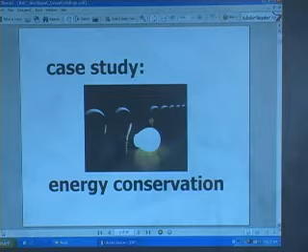This case study was in energy conservation. This woman who works for a school district, Pearl, down in Florida, she was interested in saving energy in her whole school district. It's a rather large school district. If you're from New Hampshire, school districts, you kind of think on a smaller scale. School districts could be 10 or 15 schools. Down in Florida, they could be 50 or 60 schools, if not even a lot more.

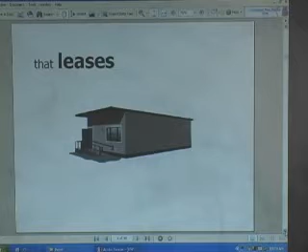And the schools down in Florida lease large numbers of the portable modular classrooms because they're growing so fast down there. The population's exploding, and there's a lot of children. So Pearl was looking for a way to save energy in all these portable classrooms. So she contacted Bruce. Bruce is an expert with KMC Controls. Bruce works for a company just like ours, although he's a little bit bigger than we are, down in Florida. And Pearl identified 12 modular classroom buildings that she wanted to target for a proposal to save some energy.

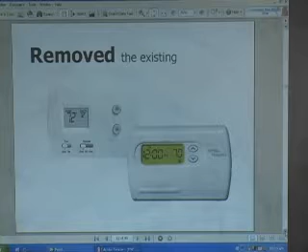So what they did is together they developed a project to remove the existing programmable thermostats. Now, they already had programmable thermostats with schedules that worked and everything for the heating and air conditioning, and mostly just air conditioning in Florida. But these programmable thermostats more or less function like a kitchen timer and a meat thermometer. Not hugely accurate and not going to accomplish a whole heck of a lot there.

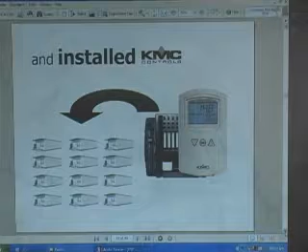So together with Bruce, they installed some building automation controls. And this isn't a KMC presentation. This wouldn't matter whether they were Johnson or Honeywell controls. The idea is that they put in a building automation system into the 12 modular classroom buildings. And Pearl, once it was completed, estimated that the project showed a return in 12 to 18 months of almost $10,000. So she got a little bit excited about that.

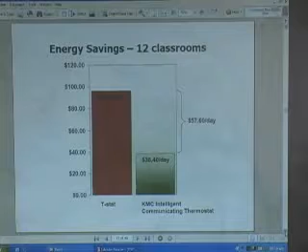And analyzing the data, they came to the conclusion that the building automation system was actually saving them about 60% of their electric bill consistently. So they became more and more excited about these facts as they were analyzing them. Looking at the actual savings, based on what real numbers are, in the Northeast here, we're probably around 10, 11 cents a kW? 12 cents? Well, I don't know what it is commercial. Residential's around 14. Okay, I think the commercial, it depends on who you have and what contracts, but they're probably closer down to 12 cents a kW.

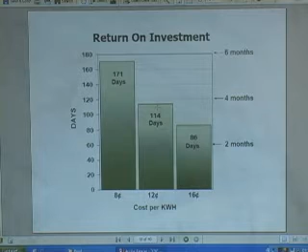Looking at this little project, though, the payback is potentially less than 4 months. In fact, down in Florida, the payback ended up being 6 months to pay for the project for the 12 classrooms. So Pearl got pretty excited about that and wrote a second proposal to install the same system with the same features in quite a few more portable classrooms. The proposal impressed the school district, and they approved it, and they moved forward.

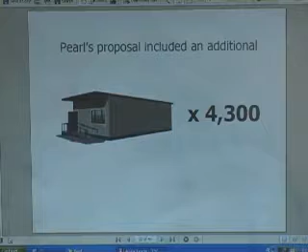Whoops. And they actually brought this to 4,300 portable classrooms in this one school district. And if you can picture this, I know it's hard. I've actually been down there to see this, but it's hard to envision over 4,000 portable classrooms in one school district, but they're there, believe it. But the bottom line is the school district is saving $7 million a year in energy savings just in the portable classrooms with this one project.

And these weren't big buildings with complex systems. I mean, they're just portable classrooms with, in many cases, if you're familiar with the stand-up air conditioning units, they're almost like a window air conditioner, but vertical and mounted to the wall. In many cases, that's all they had. They actually did a little bit more with lighting, adding a little bit of lighting to the system as well.

In addition to the electrical savings, they had a 35% reduction in maintenance on the HVAC equipment because their run times were reduced. They have less air filter changes. The equipment wear and tear has been reduced. So they're basically operating what they have in the most efficient way.

Since that project was developed and implemented, the software engineers at KMC Controls have delved into the success of this project to develop even better algorithms and controls in sequences. And they've adapted or employed a learning program. So they're actually taking

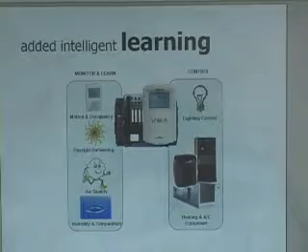motion detectors in the classrooms, and in addition to a regular schedule, they're taking the information of the light in the classroom and the occupancy of the classroom and having that further the occupancy schedule over time, to bring the lights on only when necessary, to bring the HVAC system on only when people are in the classroom. And different usages of those classrooms are learned by the system and adapted over time.

So we're just starting to see the building automation industry actually being able to take the step from a conventional schedule of 6 a.m. to 9 p.m. we're occupied. That was the initial part of what programmable thermostats did.

In building automation, we've for years done optimum stop-start, where we actually look at the temperature change in the classroom and just do a simple math formula to come up with let's start a half hour earlier to get the classroom down to temperature or up to temperature on time, and basically turn the system unoccupied earlier in the day to let it coast to save a little bit more energy.

We've even gone beyond that, and we're actually having systems learn how you're using a facility to be able to further refine the sequences. Are you monitoring, do you have a system yet where you can monitor the light levels and actually have the lights come off and on, like if it's a bright sunny day? Yes, absolutely. In addition to that, yes, they're absolutely doing that.

We've seen buildings with lighting projects where they're actually taking older fixtures and modifying them with lighting controls. So if you had a 4-light fluorescent fixture, we'll take two of the 4 lights and put them on a separate circuit, a smart circuit where we can control it. So we can look at the light levels in the area and further refine the lighting offered.

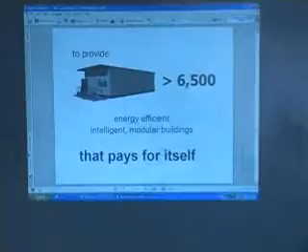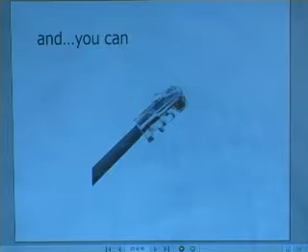So they've taken this process and dealers in big cities are providing the solution to classrooms and areas throughout the country. They're connecting all the systems via their local networks or wide area networks, and they're making a web-based control system that's taking whole school districts and campuses and being able to operate them efficiently from one central location. Even getting more savings.

Or in some areas, because you brought up one of the good points this morning when we were discussing, if there's already a system, for example, a system across the street in the other building that's a different control system manufacturer than what's going to be proposed for this building, there's ways of actually partnering those two systems together now. So you can take an energy management system with protocols that are available today and have them work together, as an end user, to have an actual enterprise-wide system that functions and operates seamlessly.

Another beauty of the type of system that we're discussing here, the building automation system, beyond a programmable thermostat, is you can actually modify the system as sequences, new ideas or concepts come up. They can just be changed and modified to stay current. Whereas with a programmable thermostat, obviously, that's not going to happen.

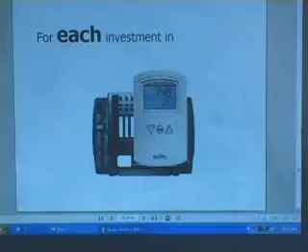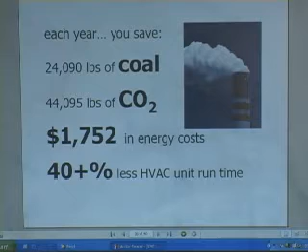For each investment in a building automation system versus your programmable kitchen timer solution, in this particular application, we're saving 24,000 pounds of coal and reducing 44,000 pounds of CO2 emissions and saving $1,752 per building in energy costs, plus 40% reduced runtime on the HVAC equipment, saving further maintenance costs. And a little bit of data, 36% of the nation's schools use portable classrooms.

So this one case study that was done with KMC Controls and a building automation contractor, much like us, has saved a significant amount of energy. It's gotten a lot of people's attention, and it really piqued my interest when it was first presented to me, because the first thing I thought of is, wow, I wonder what opportunities exist right in my own territory, even though we don't have portable classrooms widely used.

I mean, they're used, but not to the degree that they are in Florida. There's potential for some savings there. But more importantly, pretty much any building that doesn't have a building automation system is a candidate for this type of project.

So that's pretty much the end of this presentation. I wanted to show you that primarily just to give you the impact of what a building automation system can mean to a school district or to our industry. It's a changing technology that's really advancing quickly and allowing us to make some huge impacts in cost and

energy savings. Question now, because you've been talking about the same thing: most of these systems seem to be geared strictly industrial, commercial. Does anybody do home systems? Oh, yes. Want to automate a home? Absolutely.

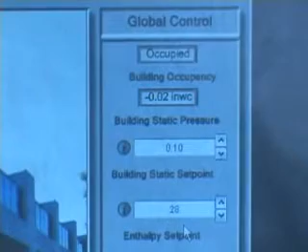They want to be able to keep that building slightly pressurized at all times because of some of the processes and tenants that are inside the building. So that's something that they're watching very closely. And energy savings is a big concern for this facility. This was an existing facility that we added our building automation system in. So they wanted to wring out a lot of energy dollars.

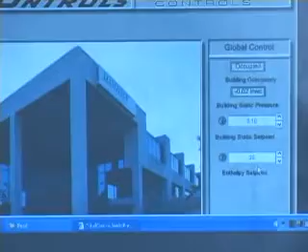Now we've just barely turned this system on. We completed the installation last week, and the front end, the graphical user interface, we actually just turned on over the weekend. So this is brand spanking new. We haven't even proofed it yet, and we haven't gone through the commissioning process yet, which is something we'll talk about a little bit later. It's amazing. It's got a relative humidity. And this is your remote login, right?

This is Internet Explorer. I'm just using Internet Explorer to browse to the site. Most of the major control manufacturers are offering software packages that allow for building automation systems to be accessible over the internet. So would you have to go to the site in order to reset parameters and things like that, or could you do that remotely? Yep, we can do it remotely, absolutely.

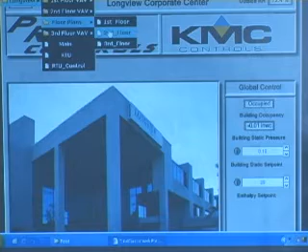There's different methods of being able to actually program the controllers. Typically, you're not going to program the controllers via the web browser. In some cases, I can. But most of the time, we're going to use a different software package, a technician's tool, per se, to get into the controller and actually program the controller. There must be some security built in. Oh, absolutely.

You can access it online. Absolutely. Well, you can have lots of fun on April Fool's Day. I can imagine.

You know, this would be a typical floor plan. We're gonna show the... It's all working too. This is great. It's a good day for me.

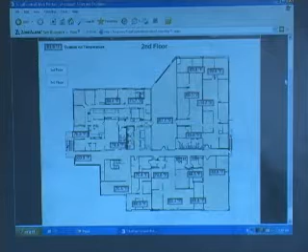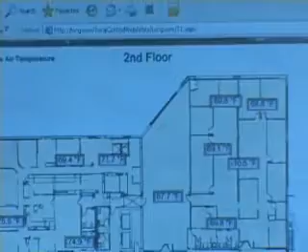We'll typically show just a floor plan that gives them some overview of what the room temperatures are in the spaces. So at a glance, the building operator can look and see if there's any glaring problems. In addition to any alarms that might happen, we display alarms right on the front end, and we can display alarms in email, pagers, cell phones.

How much control do the occupants of those rooms have on the temperatures? As much as we want to give them. For example, we'll just grab any room here. FPVAV 22. Sometimes it's hard for us to get away from the nomenclature that we work in our industry. This is one of the struggles, kind of goes with what you were talking about a little bit earlier, Wes.

We're building automation control contractors. We're working with mechanical engineers, and yet we're interfacing to an end user. So we're using terms that everybody else is, and then we're trying to translate that into a system that anybody can understand. So FPVAV, it's a fan-powered VAV box, and it's box number 22. It makes a lot of sense to me, but the folks on site may look at that and say, well, I don't like that. That doesn't tell me. I want that to say Mary's office.

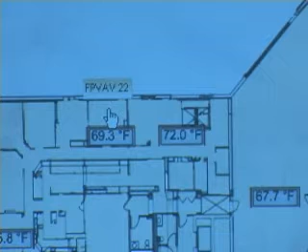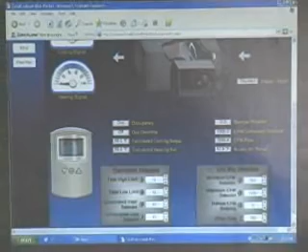Yep. So we'll dive into this VAV box right now. Wow. Very nice. Is this for that room? Yes. I just clicked on that room, and we're right down into the room. Excuse me, would it help if I tried to make the picture larger? It might, yeah. Let me see if I can do that.

So, two points I want to get back to tie this in together for you. Your question, how much range do they have in their thermostat set point? Well, this is the actual room temperature, and this is the high and low limit of what we're going to allow them to adjust at the thermostat. So what else do we want, airflow, air changes, drive operating time?

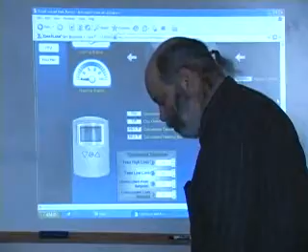Wow, 74. That sounds pretty low. Is your reheat set to 0? Or is that its current reading? That's actually its current. Right now, the stage reheat is disabled, and the heating signal is 0. Right, I see it there. Yeah, I like that.

So right now, this box is in a cooling mode. Our cooling signal is 100%, as it should be. It's working, another good thing. Everything's happening great today. The room temperature is 69.1. The actual calculated cooling set point is 68. So we're actually trying to cool that room down to 68 right now.

And you'll notice that I've labeled these. Well, I've got to do a little proofreading here. I chopped off my set points. I've labeled these calculated set points, and the reason why they're calculated is because the folks can go to their thermostat and make an adjustment, and the system is going to interpret that adjustment to do what we allow them to do. So then it becomes a calculated set point.

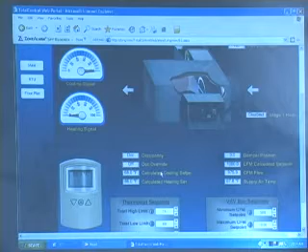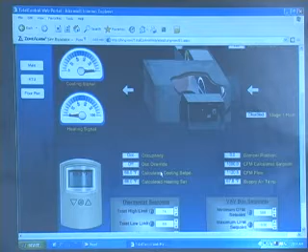For most every heating cooling application, you have a cooling set point and a heating set point. We obviously don't want those to overlap, otherwise any potential energy savings are gone if you have heat and cooling on at the same time. So we have our own internal standards, and I'm sure most building automation contractors are the same. We usually offer a 2-degree deadband between heating and cooling. That's widely accepted for most applications, offices, schools, as a standard starting point.

We'll refine that further in specific projects. We have projects where the engineer will decide that the building operator, who's maybe at a higher level than most, let's say a manufacturing business, may want to have access and control over the deadbands and other tuning parameters.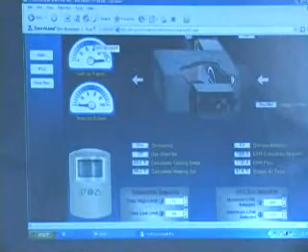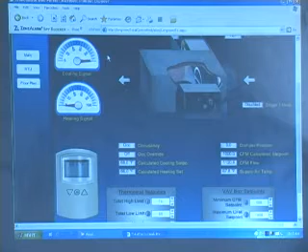If I hover over the points, our front end will actually tell you what the point is. So this is a signal from a control loop. That control loop is actually the PID functionality of the cooling set point. You guys familiar with that at all? A little bit. Proportional integral derivative gain. It's just a mathematical algorithm to try to bring the room temperature, or the medium, to the set point.

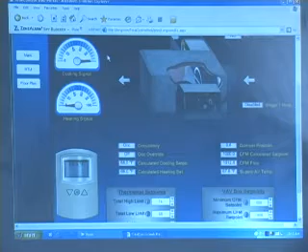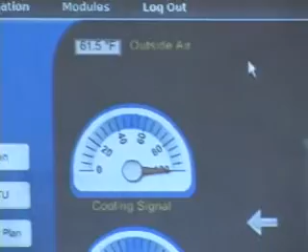I missed outside temperature, and I know it had to be there someplace. Upper left corner on all of our jobs. Right there. Thank you. The RTU on the left side, that actually goes to show you what rooftop unit it's connected to? Yep, we can jump right over there. The rooftop unit's performance too, right? Yep. I didn't really want to get into this too deep at this point, but that's okay. I love it, so that's fine with me.

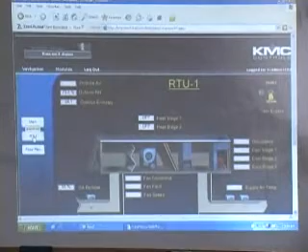Basically, when I spoke about integrations, this is an integration in its purest sense. Oh, this just fascinates me. I don't want to be an installer anymore. This rooftop itself is, I think this is a Carrier.

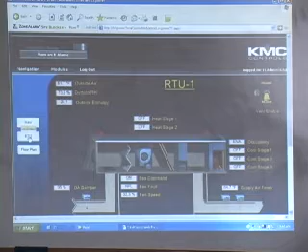I believe this is a Carrier rooftop with its own control system, and we have a KMC control system operating the building. So our building automation system is KMC, but the engineer specified BACnet as the protocol he wanted to adopt on this project. So the folks that provided the rooftop equipment had to make sure it was BACnet compliant. Our system is BACnet compliant, so we just mated the two and integrated them, and all this information from the rooftop is based on what Carrier made available for points.

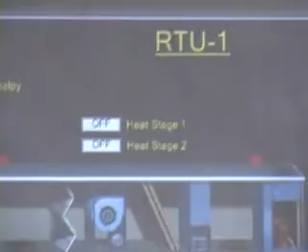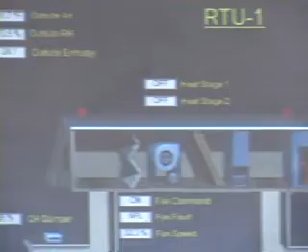One more question. Why isn't the supply air temperature the same as the outside air? Obviously it's not, but why? Preheats. It's not taking directly from outside air. Reclaiming some inside air? Well, right now, the outside air damper is 94% open.

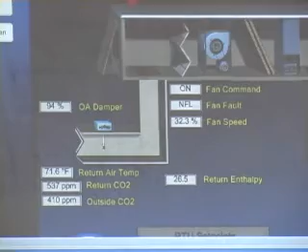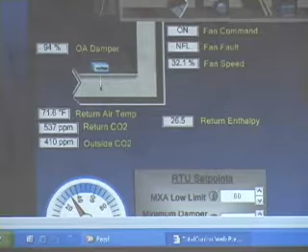The rooftop itself is idling at 36%. The VFD signal is at, I'm sorry, 32%. So the building is largely satisfied. The rooftop's not doing a whole lot of work, and what little work it's doing is with the outside air dampers economizer being open right now.

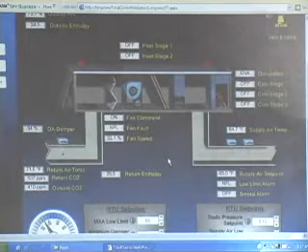So we're providing 94% outside air, maybe 6% return air, mixing that to get a 64-degree discharge air temp into the space. Believe it or not, a building like this, with a lot of people, computers, and everything else in there, we'll be cooling most of the year rather than heating. Some areas may add some heat, and this will really make you feel good about building automation. They're heating this building with electric heat.

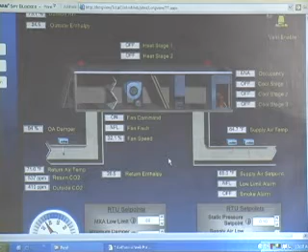Where is the building? Geothermal? No, electric. Electric heat. Massachusetts? It's in Mass, yeah. On your floor plan, does that show the entire floor plan of the building, or just the floor plan in relation to this particular roof system? This is the whole floor plan. There's actually only one rooftop for this whole building. It's a giant rooftop, though. That doesn't kind of give you the scale.

Are you saying one rooftop unit for the whole entire facility? Yes. Three floors? Yeah. So when that goes down, what's the backup system? Is that it? That's it, really? Yeah, actually, it's a good question. They actually had this rooftop designed and built for this one facility. It's actually two rooftops in one. It's in one enclosure, but each fan has a backup built into it.

So the reason for going with one rooftop unit? This is an older building. It was probably built in the early 80s. I'm going to guess at the age of the building. And we've seen over the years, Wes, you've probably seen a lot more than I have, but the whole design and concepts of building design have changed quite a bit.

I've actually gone into buildings where they've put electric reheats into the rooftops, and they put them all in the return airstream. And that was by design. I actually saw it on the original prints back in the early 60s. They don't do it like that anymore. It's totally different. So, yeah, I'm not sure what the whole idea was on that one. That did get changed, but when we were putting them in like that, we didn't understand either. I got a couple of reds.

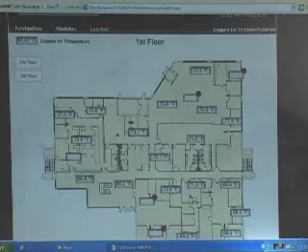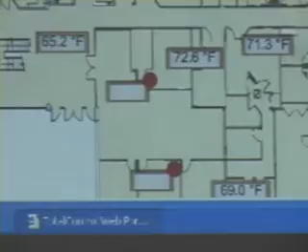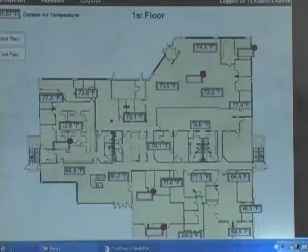What are those? Alarms? Yeah, those reds we affectionately refer to as blisters, or the measles. Those are actually VAV boxes that have probably gone offline. Since we brought the building automation system online and are able to look at the whole system, we've discovered some mechanical problems with the VAV boxes themselves. The mechanical contractors are on site today, working on some of the VAV boxes, replacing the electric heat elements. Some of these are fan-powered boxes, and some of the fans are burnt out, so they're fixing those. We noticed that during the installation process.

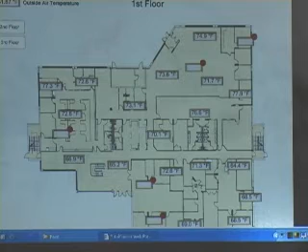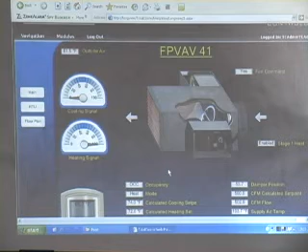So they're fixing a lot of that. If there's a few offline and we get some alarms, it's just because they're down there working on them. So if we grab a room that's a little on the cool side, this is a hallway right here, we may see one that's in a heating mode. Yep, and we're popping up some data here. The electric heat element is going to show some signs of life. It's turning red. The electric heat is enabled. Heating signal on this one is 100%. I think this is one of the broken ones. No, it's not. They fixed it.

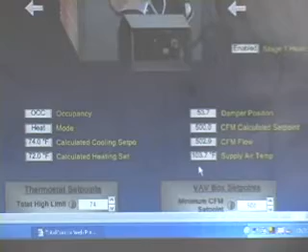Our supply air temperature from the VAV box into the space is 103 degrees, so that's a good indication the electric heat is working. On some of these, what we discovered during startup, we were trying to run the electric heat, had it enabled and turned on, and the discharge air temp was the same as what the rooftop is delivering. Pretty safe to assume there's a problem with the electric heat.

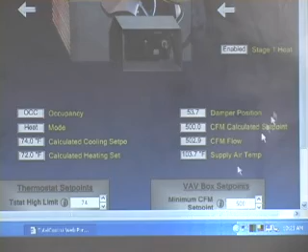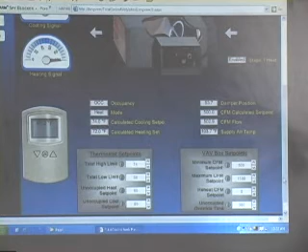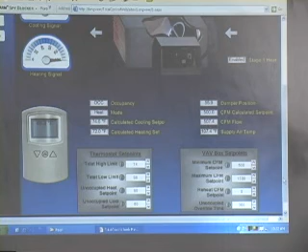Yep. And back to one of the original questions, Wes, when we design our front ends, we try to stick with certain standards we've developed in-house that seem to work, so we're consistent from project to project, which makes life a lot easier for our technicians when they're helping a customer troubleshoot a problem. It also makes training our in-house people a lot faster because they're used to seeing how we do things. Not that the way we do it is perfect. We're constantly evolving and finding better ways of doing what we do.

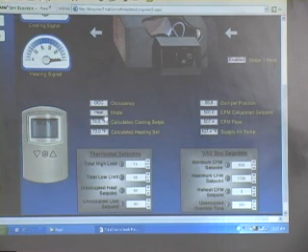But one of the standards we've adopted is that points on our graphics are either adjustable or not adjustable. Points that are not adjustable just show up as a regular point, and anything that is adjustable has little